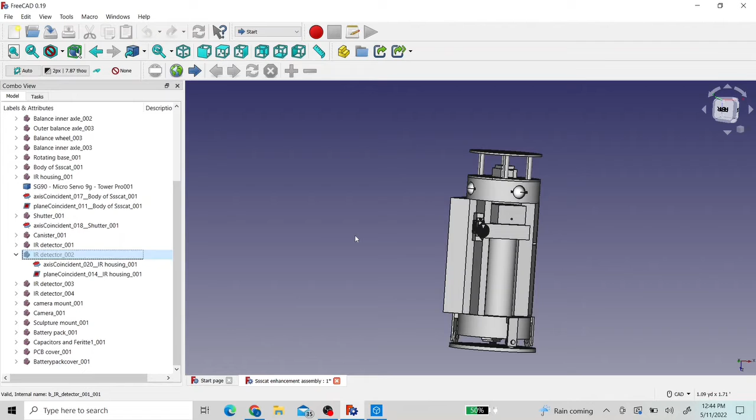So I came up with an enhancement to take care of those two things. I have on here some IR detectors, situated all the way around. There are 4 of them, so it'll be detected whether they come up from behind or wherever they come from, it'll catch the cat.

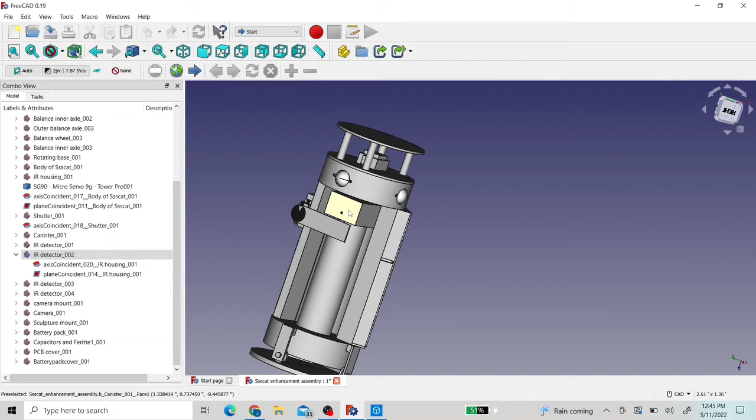So it has 4 IR detectors to catch the cat. If the cat comes up from behind, it has a 360-degree servo motor on the bottom down here that will rotate this around so that the sprayer, which is this Ssscat device, will be pointed at the cat.

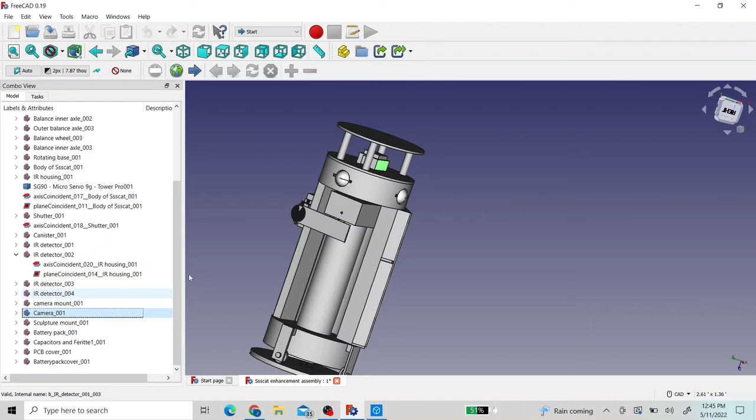And if it sees a cat, there is a camera up here on the top, right there, and that camera can detect the difference between a cat and a person. So I've got it programmed to catch the difference between a cat and a person.

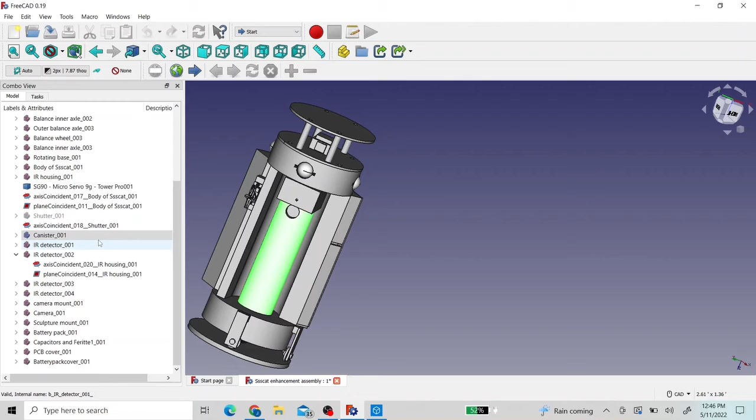So if it's a cat, it does one operation: it opens a shutter, that shutter right there, and when it opens, it exposes the motion detector of the Ssscat device and sets off the canister, spraying the cat. If it's a person, it doesn't open that shutter, it just leaves it closed, so no motion is detected and it doesn't spray.

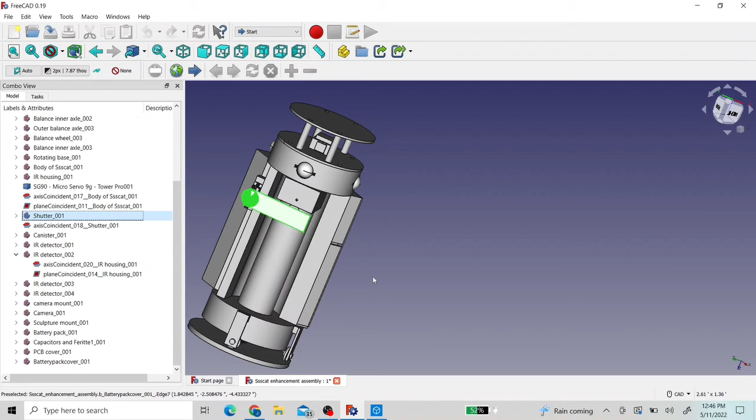So again, down here on the bottom I have a 360-degree servo rotating base that'll rotate this around. On the back side here, let me see if I can get this to rotate around.

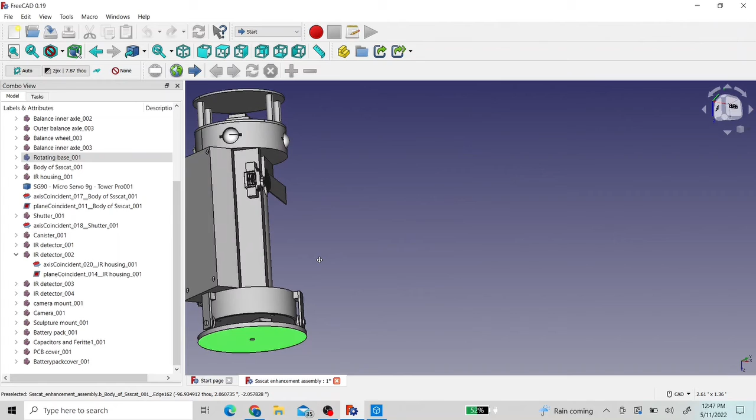I've got a cover, and that cover is covering the printed circuit board, which is right here, that controls the whole thing.

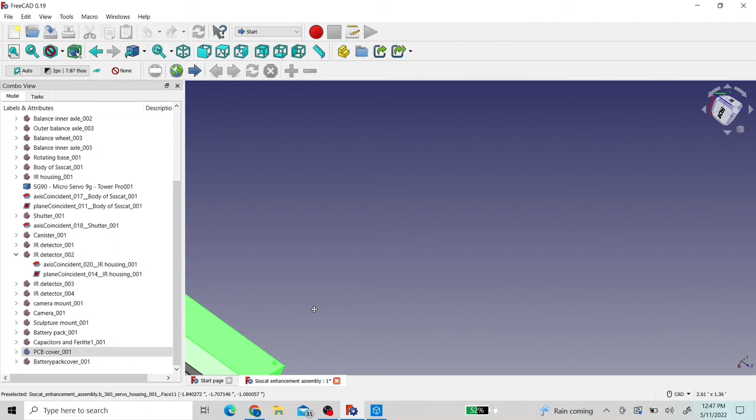Around here on the other side, I've got a second cover, and that covers the battery pack, which is right here, and it should run for quite a few days before you ever have to recharge it.

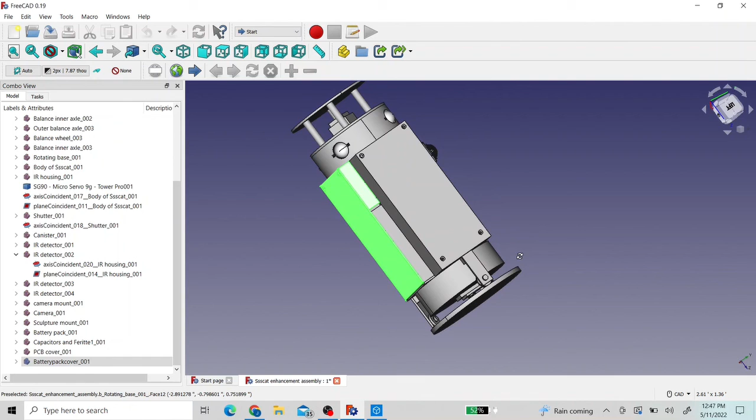It is rechargeable. So that's where I'm at with it right now. I'm going to start 3D printing the parts within the next week or so, and I'll let you know how I come along.